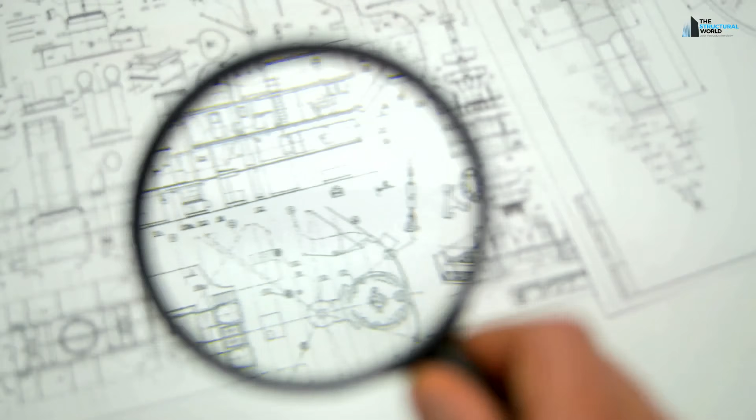Looking for an employment opportunity in the field of structural engineering wherever you may be is a tough challenge. Landing the job that you ever wanted is another milestone. But how to get there is a big question, because being shortlisted for an interview invitation itself is not that easy. So, when you get an interview invitation, it is better to make the most of it.

Nowadays, not only the unemployed are your competition in job hunting, but even employed individuals are also included, as they are continuously looking for a job, a greener field, as they say. But how can we stand out and get noticed by the employer? Readiness and preparedness is the key to get noticed by the company, as if you are prepared, you will not feel pressured when it comes to the big day.

Aside from the fact that a non-technical interview question like introducing yourself and how many years of experience you had is a given question already, here are the 5 frequently asked technical interview questions for a structural engineer's post that an interviewer will ask you about.

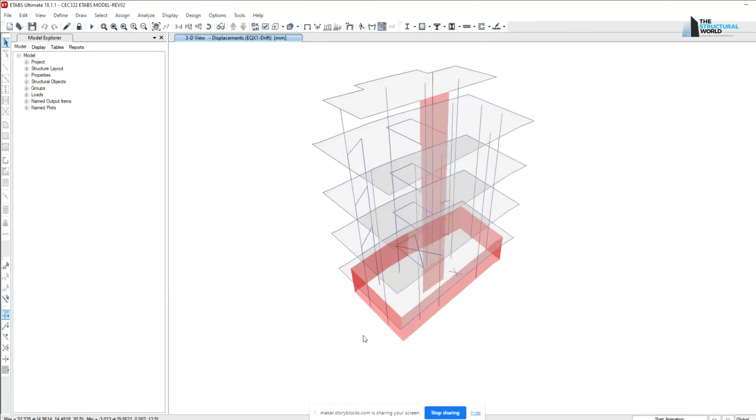1. Draw the shear and bending moment diagram. This is the most common question or task that an interviewer will ask you. This will measure your analytical ability when it comes to designing properly. We all know that structural software takes over the design analysis, but still, a fundamental knowledge in determining the shear and bending moment diagram is important.

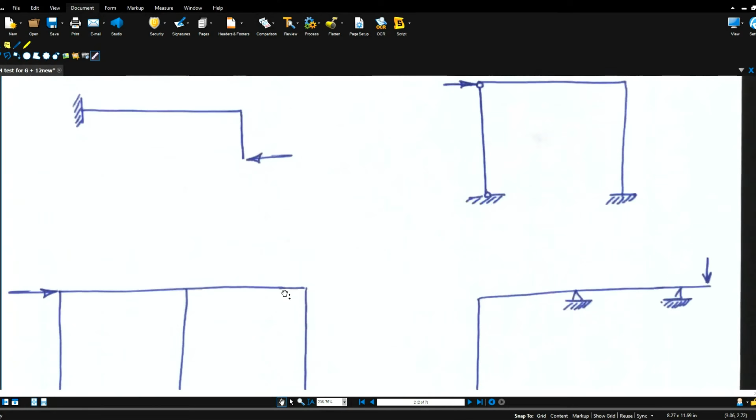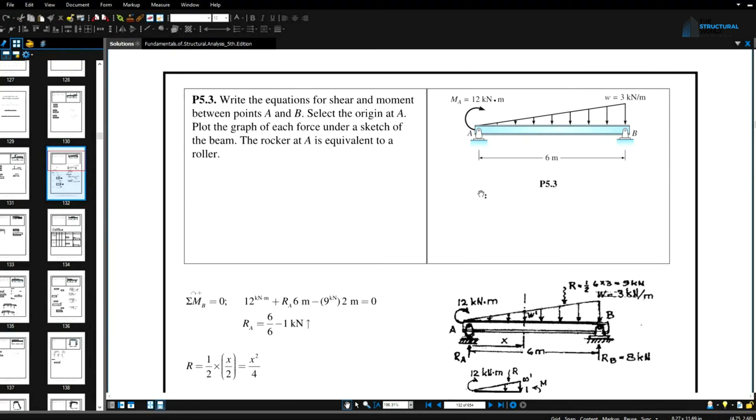Usually, the interviewer will give you sets of free body diagrams for you to sketch the shear and bending moments. As an applicant, be sure to be prepared for these sets of questions by all means, and get ready to dig those old notes back in college, if you have already forgotten about it. You don't need to focus on the complex problems, but a quick review on simple shear and BMD problems for a day or two prior to the interview proper is a big help to refresh your stock knowledge about the same.

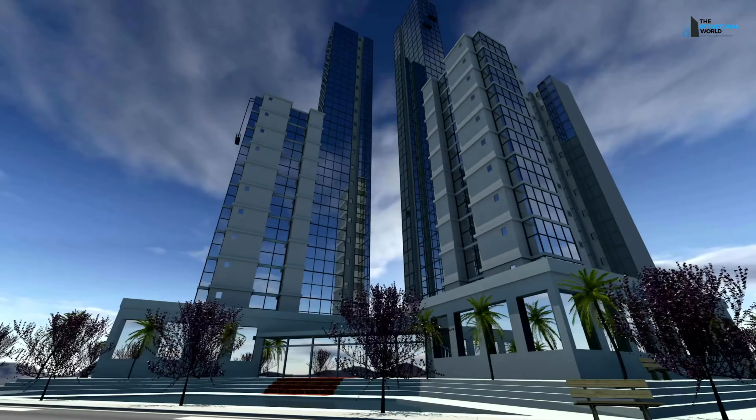2. What are the structural engineering softwares that you use in structural design? When it comes to design and analysis of a structure, structural engineering software is part of it. Sometimes you will be asked to model a simple structure to test your ability to use the different structural software. But don't worry, your modeling ability of the structure is usually the task to do. So better be prepared and refresh your skills in structural modeling.

If you don't really know what the interviewer is asking you to do, be honest and tell him or her in a polite manner.

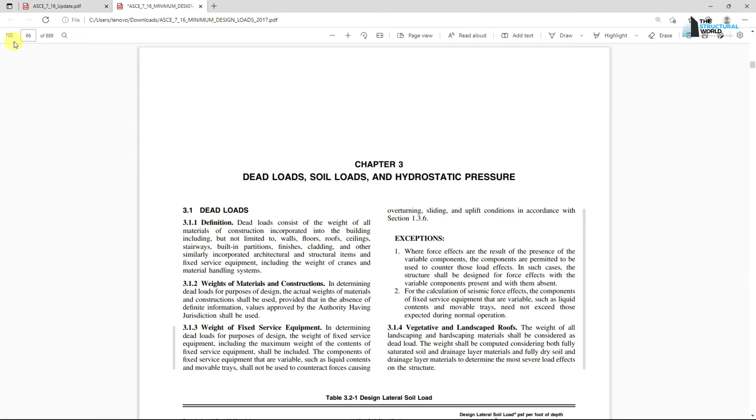3. What are the governing design codes and their uses? Knowledge of the structural design codes is another thing to be reviewed before going into an interview, as this is one of the frequently asked questions. You don't have to memorize all the parameters of these codes, but at least you should be aware of the governing code to use. There are a lot of design codes and standards out there, depending on the type of either steel or concrete structure.

But the usual codes we are using in structural design are the ACI 318 code or BS 8110 for the design of concrete structures, and IBC, UBC 97 or ASCE 7 for design loadings and combinations, as well as wind and seismic analysis. Furthermore, you should also be aware of the local codes as recommended by the local authorities. So make sure that you are equipped with the possible design code knowledge for the possible questions.

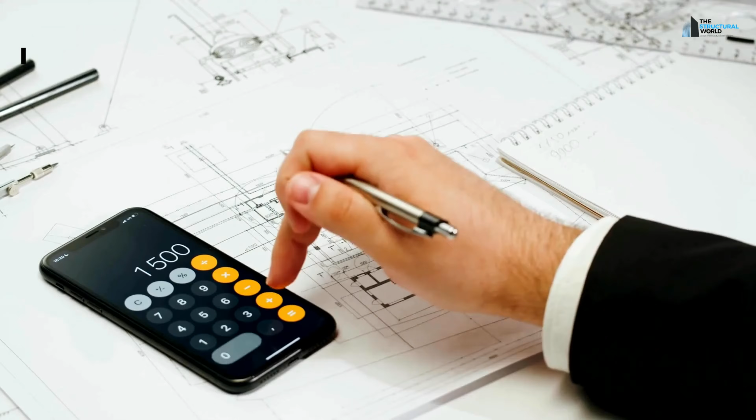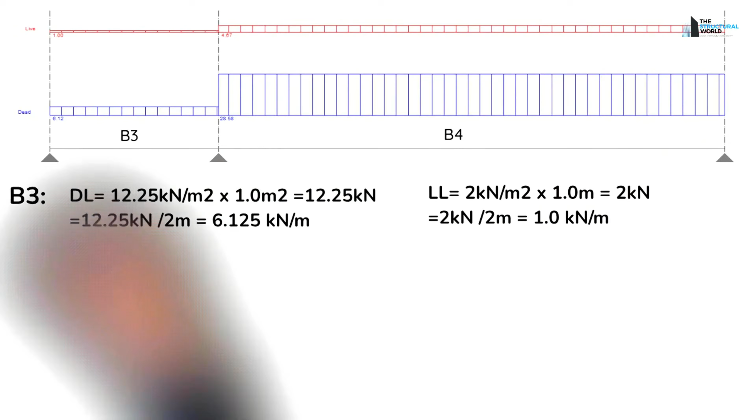4. Provide manual design calculations. Simple design calculations are sometimes included in a technical interview for structural engineers, like the punching shear principles, a design of beams or footings, to name a few. So better to be prepared for all of those design-related questions and try to review them, so your mind will be refreshed. We know that you already tackled this previously, and refreshing is a good way to jumpstart to save the day.

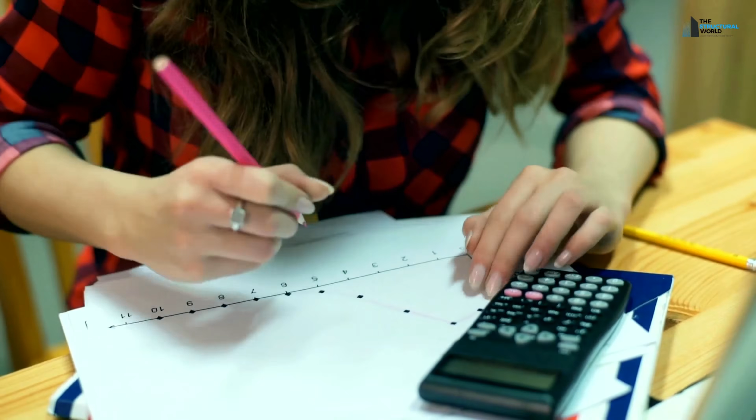5. Detailing and sketching. As a structural designer, interpreting the design result in a drawing is part of it. That is why sketching or providing details is another task an interviewer will sometimes ask you to do. Most of the time it includes general details that are commonly used in structural drawings, ranging from the simple typical details of beam reinforcements, footings, wall, to raft reinforcement details, wall sections and pile foundations, to name a few.

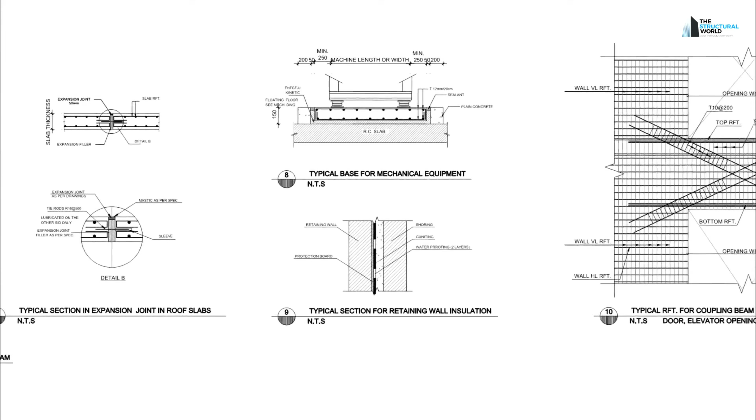If you think you are struggling with the detailing and sketching, looking back to the structural drawings of previous projects that you made is a big help to overcome this task.